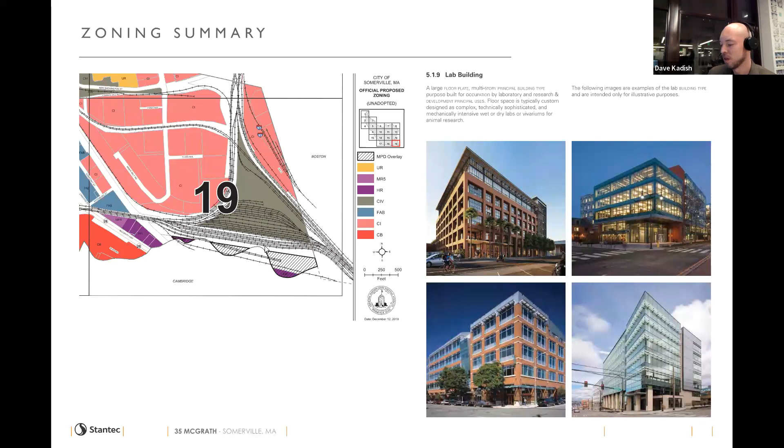Starting with the zoning, we are in the high-rise district right over here along McGrath Highway, bordering the tracks behind us, and we are proposing a lab building, as Tom mentioned. We are compliant with all of the requirements of the Somerville zoning, with exception to the relief that we are requesting through this meeting tonight.

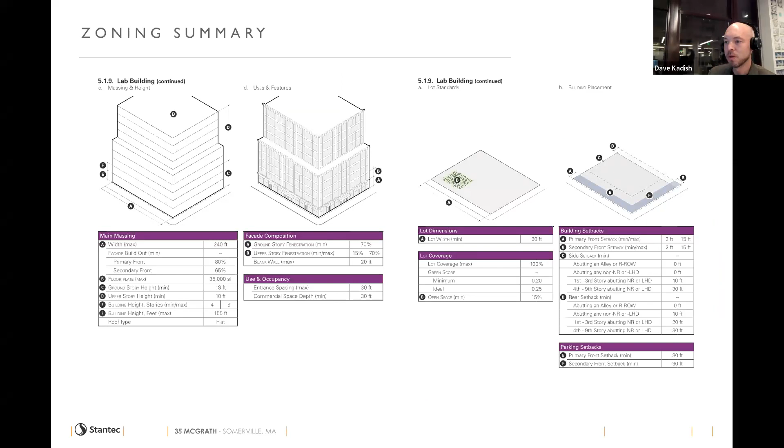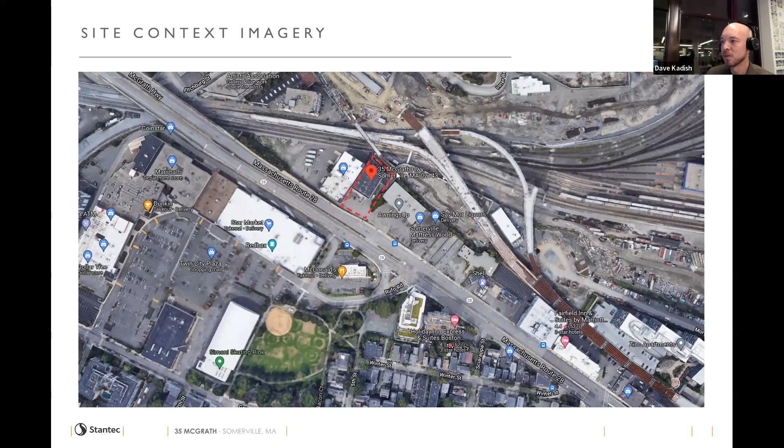A couple images to help locate you on the site. We are the red dashed line here, across from the shopping center, again along McGrath Highway, and behind us is the new walking and bike trail through Somerville. Just a little bit more zoomed in, the current existing building is here. It is currently a white box as you would see it today, with a parking lot in front. And just to the south, or page right here, is the new development 15 McGrath, which is currently under construction today.

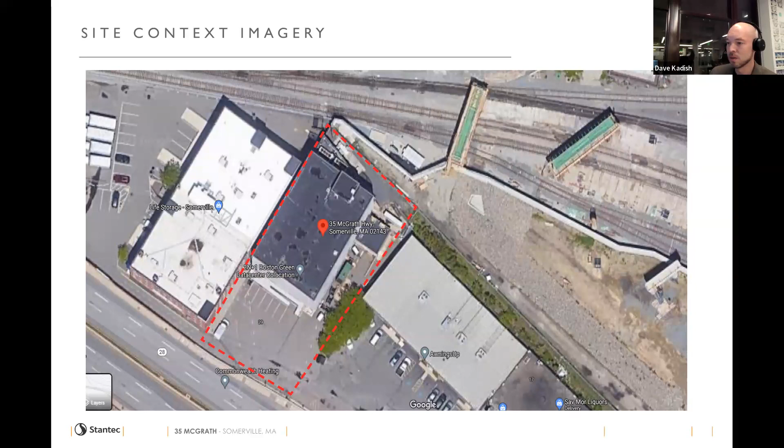As Tom mentioned, this is a little bit of an awkward site. Our frontage along McGrath Highway here is at an angle, as you can see my mouse pointing this way. So it's a little bit of an odd geometry, which is why we're asking for some relief, which we'll get to further in the presentation, showing how the building will interact with that front lot line.

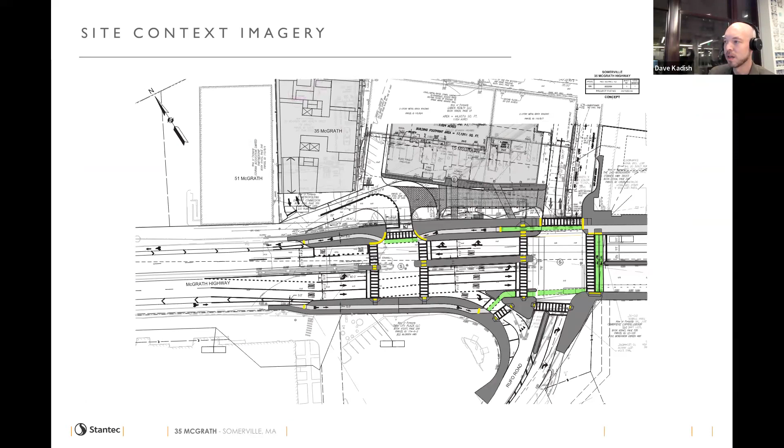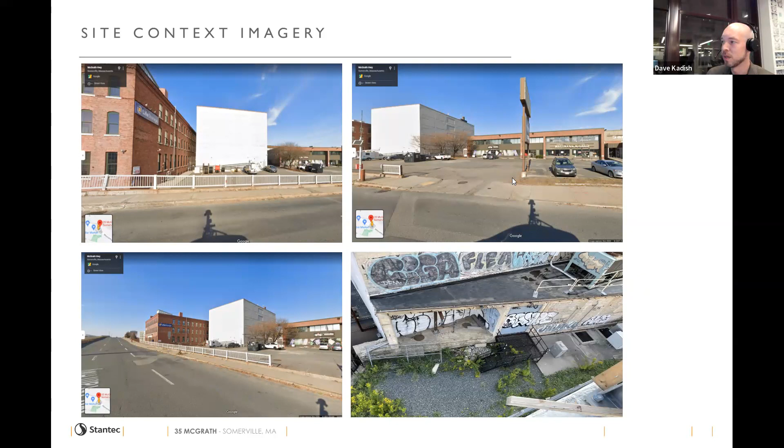Some context images - this is almost exactly a white box with parking in the front, with the McGrath Highway bridge starting to rise up in front of our site. Access will come around that in the future. You'll see images of the back and some context images to the right. This image in the top right shows 15 McGrath will be in this area, with our building immediately to the north.

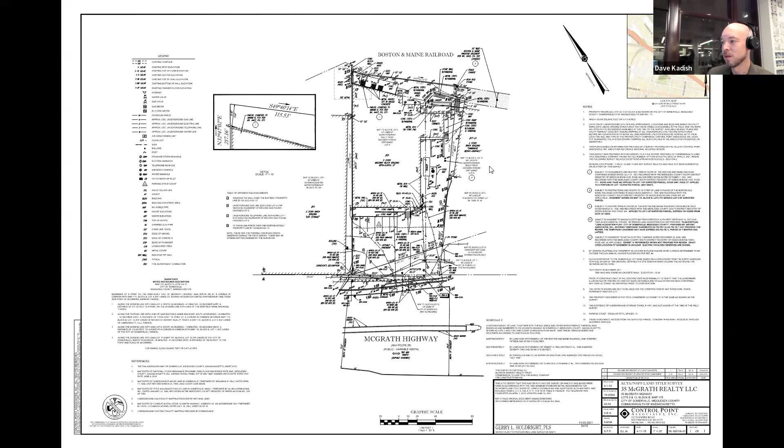To orient you, McGrath Highway is on the left here, so we did rotate it. We do have 51 McGrath - we do have a vehicular access for trucks only to come along back, but there's a variance here allowing our vehicles or trucks to come back on the side and back into our loading docks, an easement. Along the front here, this is our main entrance.

One reason we're requesting a little bit further than the 15-foot maximum setback is to allow a pedestrian entrance at the ground level. For vehicles along the front frontage, the only way for cars to get into our site would be to come along here and enter down our ramp along the front of the building.

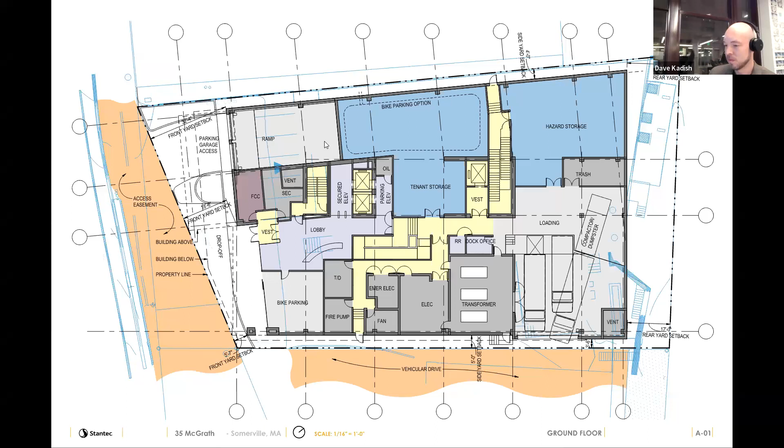The upper floor does comply with the maximum 15-foot setback. However, the minimum 2-foot setback is a variance we are asking for tonight. As you can see here, we are showing a building shape that does not comply with being parallel to the front lot line. This gives us some flexibility in the range of design that we'll show you later in the project.

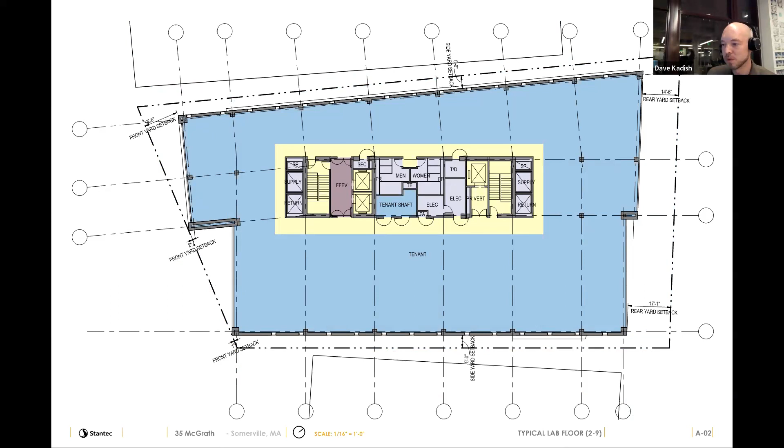We do have 3 levels of below-grade parking, all within our property line. Our building is compliant with the 9-story height maximum and height dimension of less than 155 feet. We do have 9 floors of lab space plus the double-height penthouse above.

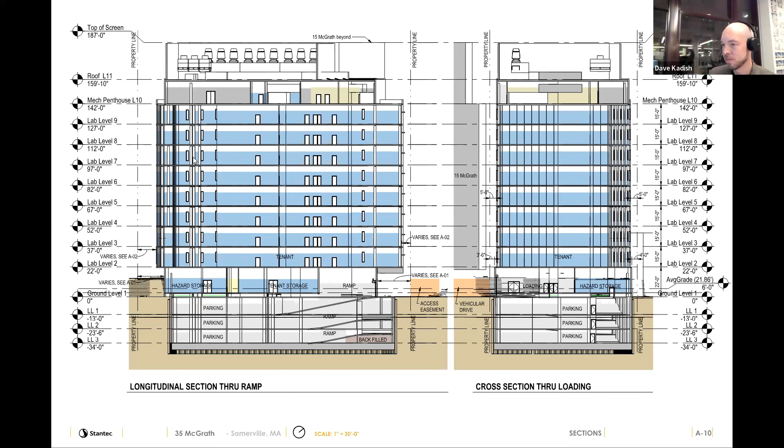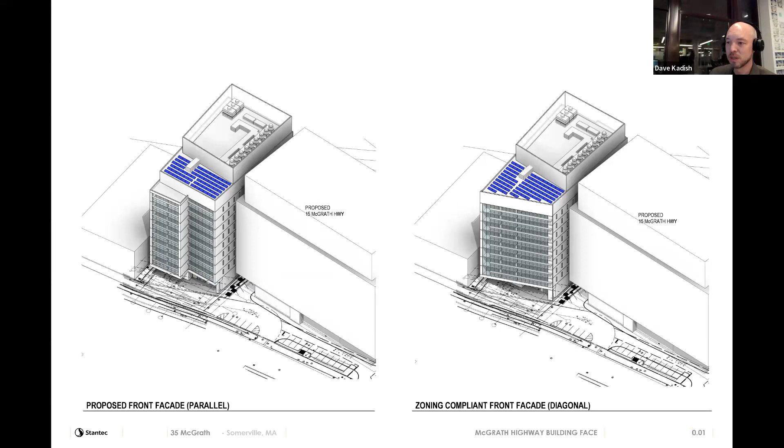We have a bit of a side-by-side comparison here. If we were compliant with being parallel to the street edge, we would have this wedge shape of the building. In our proposed diagram, we're just showing a step to create some variation. As the design has progressed, it's become a combination of the two, but having that flexibility creates a much stronger presence for this building and a stronger street edge between the neighboring structures.

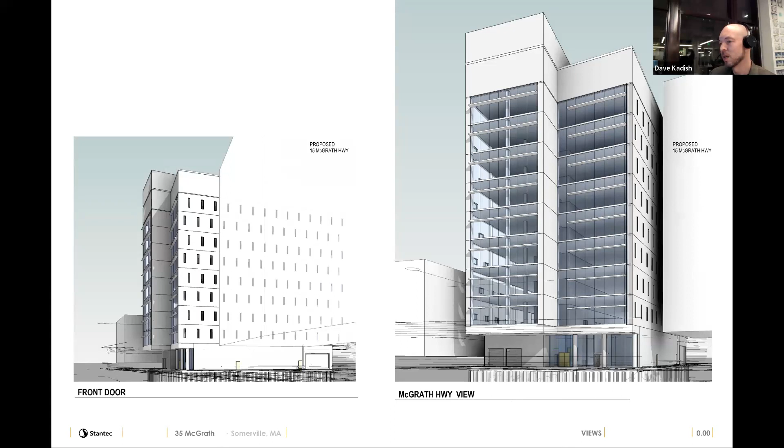Again, just some views here at street level, looking up at the building, showing how this would feel being a bit orthogonal to the neighboring buildings with the stepping of the facade. And a bird's eye view of the same on the right-hand side - you'll see the front of the building with that step, and on the left-hand side here is the rear, which would be the walking and bike trail behind on the MBTA.

And that is our presentation for this evening. Thank you.

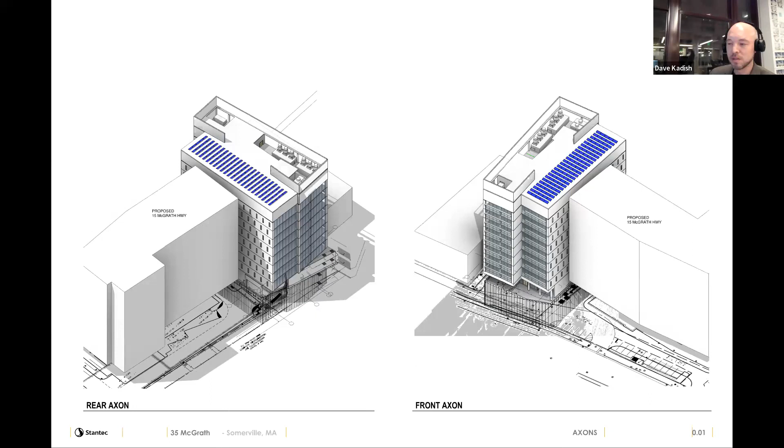David, if I may just jump in for a second, Madam Chair - my name is BK Boley, I'm the design principal for the project. Unfortunately, I cannot get my camera to turn on. It was a bad hair day, but that's not the reason it's off. It was on earlier, for some reason I cannot get it to work.

One of the things the design guidelines originally intended was to create an urban street wall all along McGrath Highway, which is why you had a 2-foot minimum, 15-foot maximum setback. One of the things you pointed out at the previous meeting was that this allowed us to work within the spirit of that guideline by having a stepped facade if necessary.

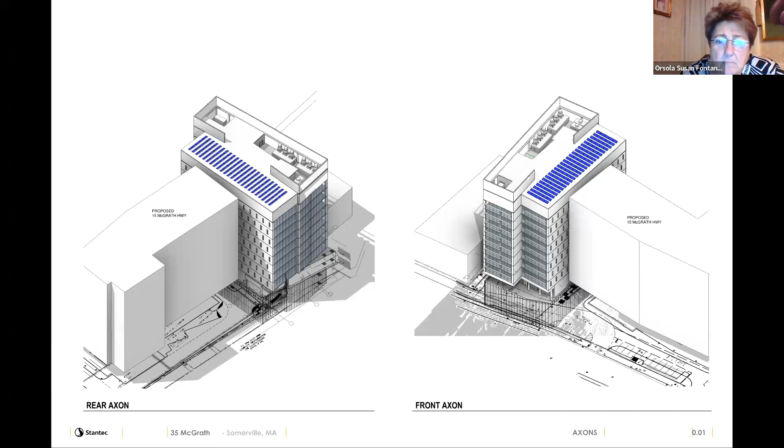Especially in the options and flexibility we needed going into the Urban Design Commission, where we were proposing 3 different massing options and then 3 different facade options for each. We liked having that additional flexibility from the variances to let the ground floors step back, have the garage entrance where it could really only work, and either have facades parallel to McGrath Highway or transition between the building on our right at 15 McGrath and the existing buildings on the left.

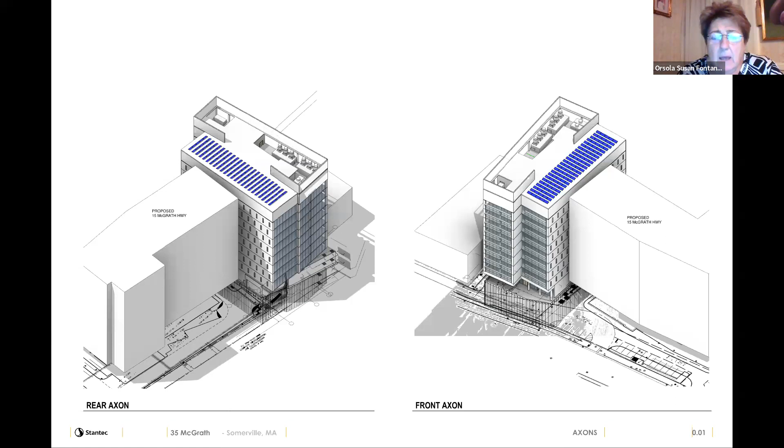Okay, I have a question. What's the distance between the 2 buildings on your side there, 15 McGrath?

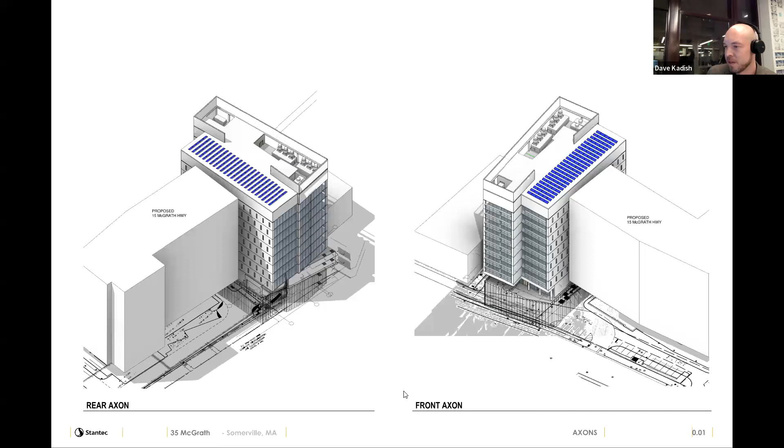So we are set back from the property line 5 feet, and I believe they are a similar distance. I can try to go back here.

So it should be about 10 feet between the buildings at its tightest point. It was just something curious because, on these demos, they look so tight, and I was just wondering, we're building all brand new, why we're doing them so tight, but thank you.

Sure. Anybody else? No? Okay, now from the public, may I please see if we have anybody from the public that's coming in to weigh in on this? The public portion is open.

Madam Chair, this is Andrew Kaminsky speaking. I don't see anyone in the public with their hand raised at this time. Okay, thank you. We'll leave that out for a few minutes just in case somebody signs on.

Okay, and to our staff, to the board, does anybody have any questions? I know some were here. You could take down this example.

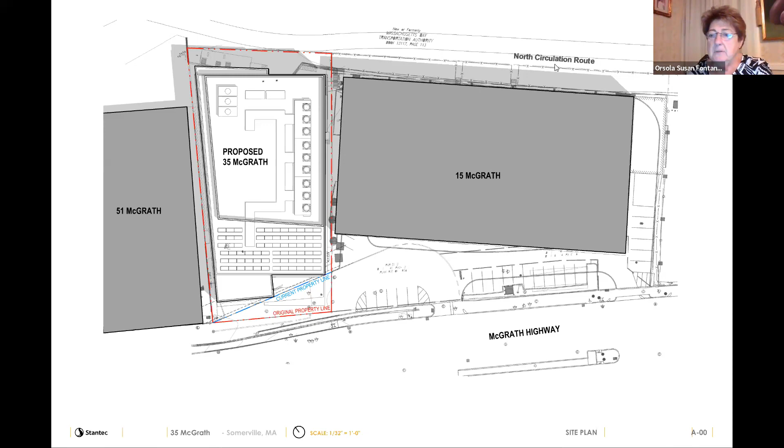Thank you. Who was not here the last time? Brian, Cecia, Ann Fullerton, you were, yes? That's what I thought. Okay.

I'm gonna have Cecia vote on this tonight as our alternate. One of our members is out, so they'll give us our 5.

So I want to give you folks, everybody, the courtesy. If you have any other questions, anything inspire you tonight that you were inquisitive about, or the 2 new folks, Brian and Cecia, if you have comments, we'd love to hear them. No. Okay, good. All right.

So you folks ready to vote? That's it? We're ready to go forward? Okay, I'm looking at our clerk, Catherine. Do we need to discuss any of the elements here? 1 minute, Andrew. If there's nothing more from the board before you go on, Catherine, I'm sorry.

I'm going to close the public portion. No one else has shown up, Andrew? Okay, no, thank you. Madam Chair, no one has. All right, thank you. So we're closing the public portion of the meeting and moving on to Catherine.

Your question was, please, if we need to be discussing? I am so sorry, my brain just completely turned off mid-thought. The elements that we need to be just making this decision on, do we need to be discussing these?